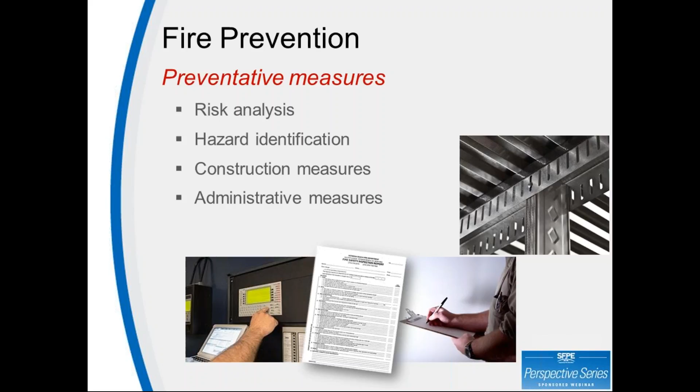Understanding that fires can and do happen, fire protection is a combination of active and passive components intended to minimize the impact of an event. Passive fire protection includes design of building and infrastructures, use of fire resistive and retardant materials in construction, provisions of isolating fire, firewalls and doors, smoke doors, training, signage, markings, and evacuation of building in case of a fire. Whereas active fire protection includes methods to detect a developing fire and alert emergency personnel, and a means to effectively extinguish a fire. So to minimize a fire risk and its impact, organizations should develop and implement comprehensive and objective fire protection programs.

Program elements should include fire prevention efforts, building construction improvements, methods to detect a developing fire and alert emergency personnel, and a means to effectively extinguish a fire. Each component is important towards the overall accomplishment of the organization's fire safety goal. It's important for management to outline desired protection objectives during fire and establish a program that addresses these goals.

The fundamental objective of fire protection is to detect, control, and mitigate the consequences of a fire. Understanding fire development and behavior is beneficial to better planning the protection process. Typically, fire begins as a slow-growth smoldering process, which may last from a few minutes to several hours. It's during this period heat generation increases during light to moderate volumes of smoke. It's during this stage that early detection, either human or automatic, followed by a timely response by qualified fire emergency personnel, can control the fire before significant losses occur.

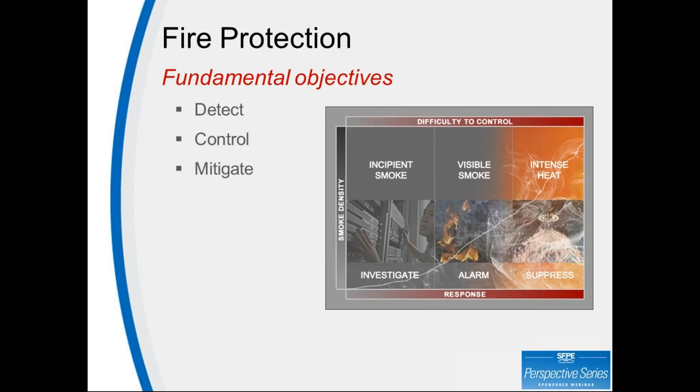So as fire growth develops, it becomes progressively more difficult to control, is the message here. The incipient stage of the development of fire offers the best opportunity to control and mitigate consequences of a fire, potentially turning what otherwise would have been a firefighting exercise into nothing more than a maintenance exercise.

Automatic fire detection and alarm systems play an essential role in meeting fire protection objectives. With so much at stake, it's imperative that they be applied correctly and are able to perform their intended function. There are a variety of technologies available, and selection is based off an effective response within a particular stage of fire development. There are essentially three major categories of fire detection technologies, the first of which are thermal detectors.

Thermal detectors include both fixed temperature and rate of rise detectors. Both of these units are classified as spot-type detectors. A third category of thermal detectors includes linear fixed temperature type devices.

Thermal detectors do not function until room temperatures have reached a substantial temperature, at which point the fire is potentially well underway and the damage is growing exponentially. Subsequently, they are not recommended in locations where there is a desire to identify a fire before substantial flames occur.

The second category is flame detectors, which are line-of-sight devices that operate on either an infrared, ultraviolet, or combination principle. Where there is a potential for incipient behavior and the goal is to detect before flames occur, similar to thermal devices, they are not recommended in locations where there is a desire to identify a fire before flames occur.

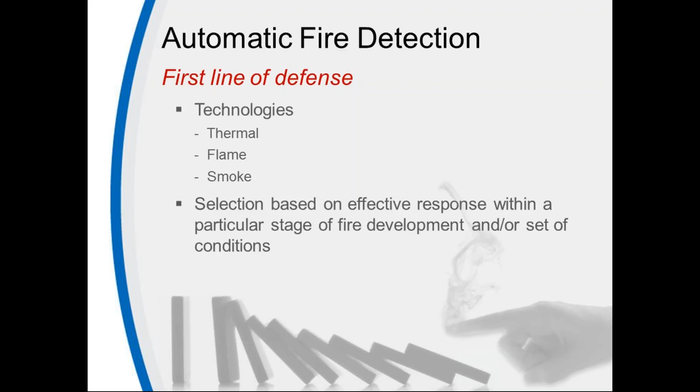Of course, the third and last category is smoke detectors. As the name implies, these devices are designed to identify fire while it's in its smoldering or early stages of development.

Common smoke detector technologies include, but are not limited to, spot type, beam type, and air sampling type devices. When properly selected, designed, and installed, a key advantage of smoke detectors is their ability to identify a fire while in the early stages of fire development. And as such, they provide added opportunity for emergency personnel to respond and control the developing condition before severe damage occurs. They are usually the preferred detection method in life safety and high-value applications.

Spot-type detectors that are placed along ceilings or high on walls operate on either an ionization or photoelectric principle, with each type having advantages in different applications.

For large open spaces such as atria, frequently used smoke detectors are optical or projected beam type devices. These types of detector generally consist of two components, a transmitter and a receiver, mounted some distance apart. As smoke migrates between the two components, transmission of light becomes obscured or obstructed, which is interpreted as a smoke condition.

Now, a third type of smoke detector, which is becoming more widely adopted for some of its performance attributes, is the air sampling type system. This type of detector consists of two main components: a control unit that houses the detection chamber, an aspiration fan, and operation circuitry. Then, of course, a network of sampling tubes or pipes.

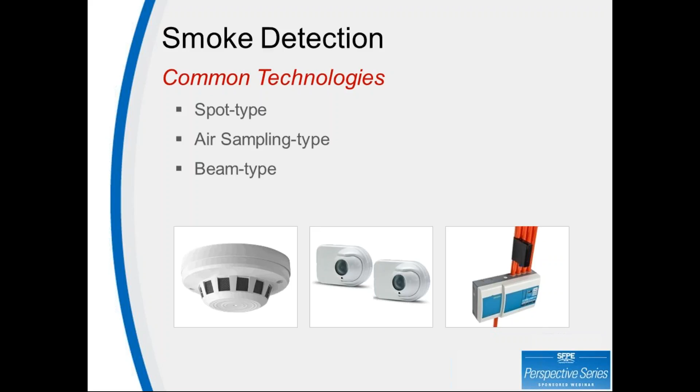Spot-type detectors offer key advantages with respect to addressability, electrical supervision, and signaling line circuit integration. They are simple to engineer into a project and, depending on conditions, relatively inexpensive to install.

Air sampling type detectors, having high sensitivity capabilities when properly applied and commissioned, are typically the fastest responding automatic detection method. Many IT and communication organizations have standardized on air sampling, but over the years application has significantly grown outside these verticals as a result of other key attributes the technology has to offer.

Attributes such as active performance, physical supervision, centralized performance, and multiple alarm thresholds across a wide sensitivity range have allowed the technology to be applied in a diverse range of applications, typically intended to solve particular challenges that would otherwise prevent other forms of detection technologies from being effectively applied.

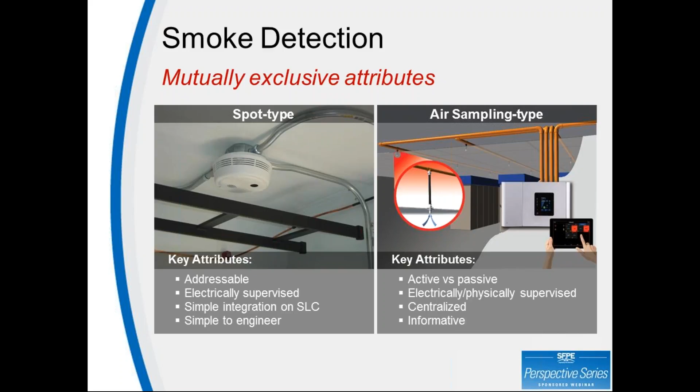While these are both great technology innovations, there remain challenges for certain applications that neither technology adequately addresses, presenting an opportunity for the development of new innovations.

Innovation generally comes about as a result of fulfilling a particular need or set of needs. As the act of innovating, it often starts with users expressing a desirable attribute to solve particular challenges. It's then up to the innovator to interpret those needs as articulated, and to anticipate the unarticulated needs, analyzing what is possible via technology and what is viable in the marketplace.

Innovations can take the form of a completely new method or approach, or take attributes of existing technologies having mutually exclusive attributes, refining and combining those attributes to form a variant of what exists.

Innovation is often the role of manufacturers, whose goal is generally to grow market share, maintain a competitive edge, and as it relates to fire protection, improve life safety. Essential to the process is voice of the customer, who in our world of fire protection could be the end user, specifying engineer, insurer, AHJ, or system integrator.

So as it relates to smoke detection, what do we commonly hear? Common challenges when installing smoke detectors include placement of detection points in congested spaces or tight quarters, complexity and cost attributed to installing conduits for spot-type detectors when required, or rigid pipe networks related to air sampling type systems in hard-to-access, congested, or retrofit spaces.

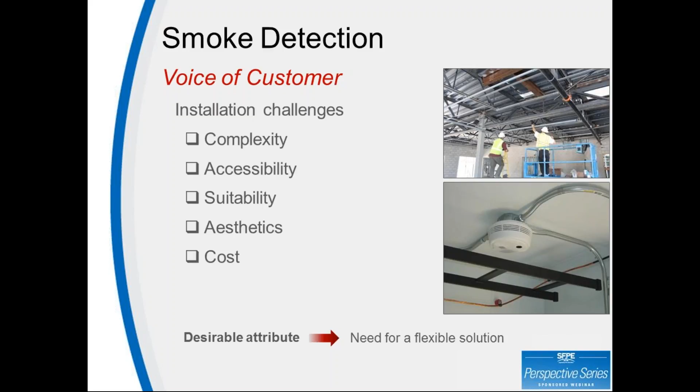Typical challenges as it relates to test, inspection, and maintenance of smoke detectors include, of course, accessibility of detection points in tough areas once installed.

This can include floor or ceiling voids when present, congested spaces above or near obstructions, hazardous locations, safety of personnel when working hazardous locations or in hard-to-access areas, risk of business disruption when working above sensitive equipment or processes, and security of information and assets in restricted areas, and of course increased life cycle costs attributed to working in challenging conditions.

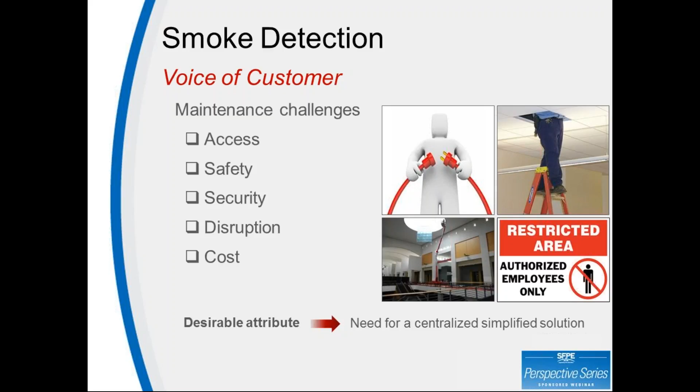The desire to have absolute confidence that smoke detection systems will perform their intended function when needed is also critical. While many appreciate the electrical supervision aspects of current technology, there remain questions about functional supervision - that is, the ability to detect obstructions or breaches that would otherwise render the detection system's performance ineffective.

So things like covers placed intentionally or unintentionally, or loading of debris over time, which potentially can go unsupervised, preventing smoke from reaching the detector. Or for an air sampling type system having a large pipe distribution network, the ability to supervise breach of a single hole. Routine inspections in accordance with codes and standards are intended to identify such breaches, but the desire is to not wait perhaps as long as a year before identifying such conditions.

So while these are articulated desires, an example of an unarticulated desire would be that the detection system incorporates preventative measures to routinely and actively keep debris from obstructing smoke.

Budgets are continually challenged. Organizations are continually looking for ways to reduce spending. So the message from the market is loud and clear: there needs to be a solution that can potentially reduce cost, either upfront or over the life of the installation.

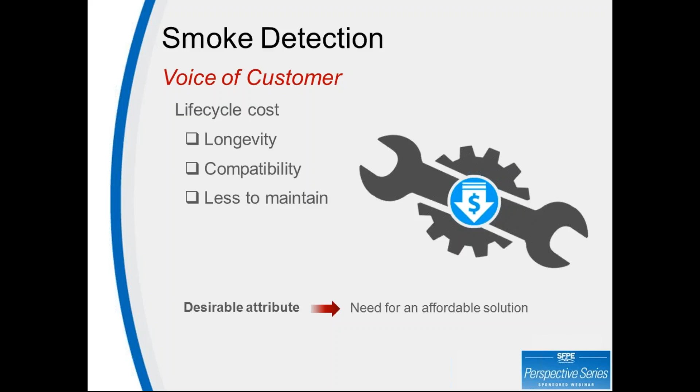The market wants a solution that has a long life cycle, is compatible if other parts of the system are replaced or upgraded, and is physically easier to test, inspect, and maintain. Centralized performance is of significant interest, but as well, a system that is compatible across panel models or brands.

There's also a desire that smoke detectors be more informative about their operating parameters and the physical environment surrounding them, so that personnel can make informed decisions. Things like real-time obscuration levels, event history, maintenance views, and multiple alarm levels for stage response were all important.

The market additionally desired that this information be easily but securely accessible anywhere, anytime, and that the information and tools for accessing the data be intuitive.

So responding to voice of customer, an innovation meeting most of what's been articulated is now available. Let's take a close-up look at this technology.

It was about 18 months ago when this technology was first released, and I had the privilege of introducing this technology via a similar SFPE session. Perhaps some of you were in attendance. While some things remain unchanged and will be a refresher, much has been learned about the technology since its introduction.

This innovation might be best described as a hybrid solution in that it incorporates addressable attributes of spot type detection coupled with key attributes of air sampling type detection, adding other essential attributes that set it apart from anything available before. One key attribute of air sampling type systems is their active performance, meaning the environment is physically and continually drawn into the detection chamber as opposed to passively waiting for smoke to reach the detector.

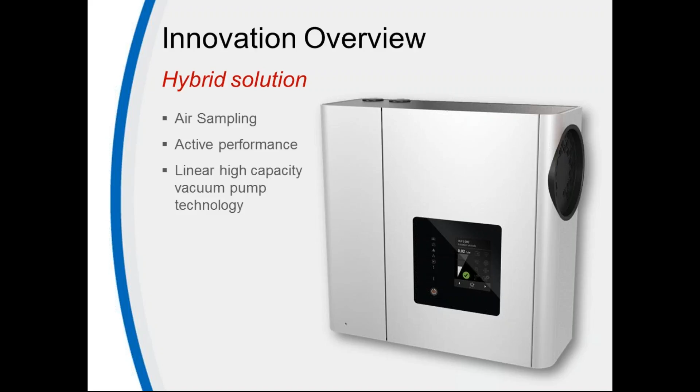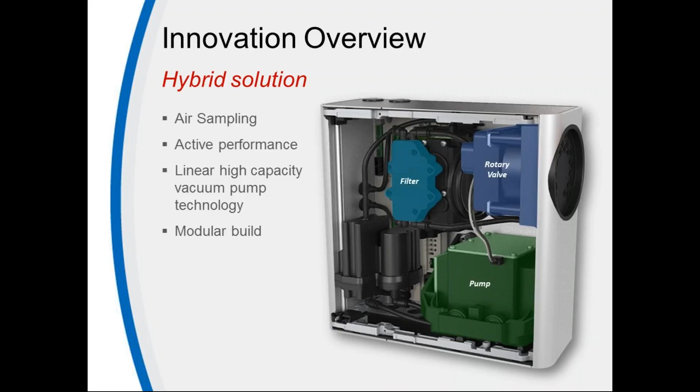The detector is modular in nature, with each component being field replaceable. Inside, for the main components, we'll find a rotary valve, a pump, a filter, smoke modules, and sample tube inlet, which accepts up to 40 addressable sampling points. So on one device, we have the potential for monitoring up to 40 discrete locations.

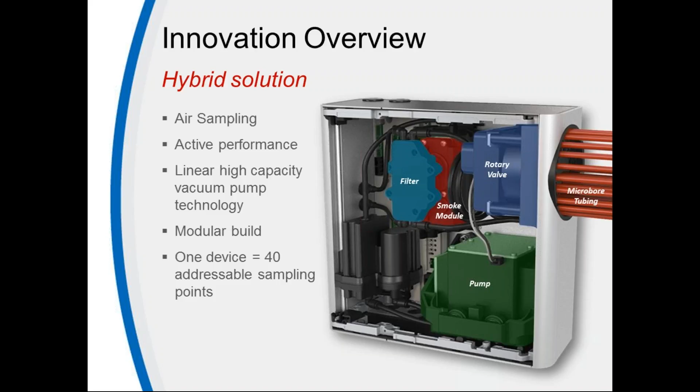System components are minimal and fairly straightforward. Main components of the system include the detector, an external 24-volt DC power supply, flexible fire-rated microbore tubing with a capacity of up to 40 tubes, each having a maximum capacity of up to 330 feet, and remote sample points available in either flush mount or surface mount configurations.

Unlike traditional air sampling type systems, there's no gluing of tubes. Tubes are easily assembled using push-in quick connect fittings for a secure connection.

The technology utilizes laser-based light scattering detection principle. Optical protection is provided, eliminating the need for incorporating drift compensation techniques or calibration requirements. This enables the device to provide absolute smoke measurement across the life of its operation.

There's a total of 2 detection chambers provided within the unit, each supporting up to 20 detection points. This reduces the effect of chamber dilution, aids in rapid detection of smoke in scan sequences, and also provides the ability to set up sensitivity for groups of detection points.

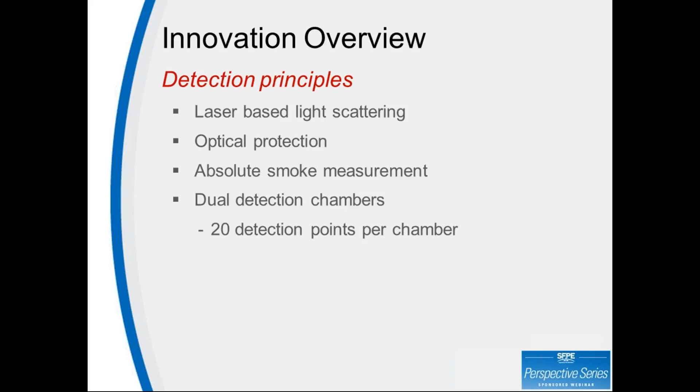There's a total of 4 alarm thresholds provided, and those are 2 pre-alarms and 2 alarm thresholds, permitting staged response throughout fire growth development.

The system provides 3 possible alarm threshold setting options correlating to sample port sensitivities, and those are high, which is 0.5% obscuration per foot, enhanced at 1.22% obscuration per foot, and standard sensitivity at 2.44% obscuration per foot.

Pre-alarms and Fire 2 are set as a percentage of alarm thresholds. This simplifies the process of setting up the detector, but yet allows the commissioning technician the flexibility to set thresholds in accordance with project performance objectives.

The innovation provides many ways to connect for programming, monitoring, and primary signaling. It supports network connectivity between devices over RS-485. It also incorporates a USB port, which may be used for initial configuration and local maintenance or servicing of the detector using a local PC.

It also supports TCP over Ethernet. The Ethernet port may be used for temporary programming or permanent network connection to the detector, and it provides a gateway to other devices on the network.

Wi-Fi connectivity is also supported. Wi-Fi allows connection of local client PCs to the detector and provides a gateway to any other device on the network. It can also be used for temporary programming or as a permanent connection to the network.

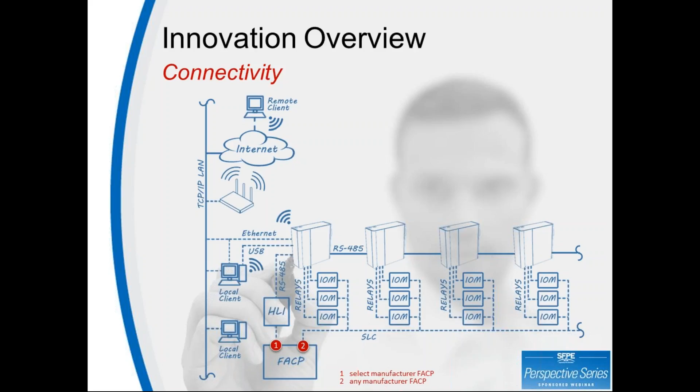So now let's take a look at the centralized attributes of the technology. Certainly a key advantage, centralized attributes allow for remote and centralized testing and maintenance of the system without ever having to go to individual ports in the field, unless they've been physically damaged and are in need of repair. This offers unprecedented safety and security, requiring only one man and no special tools, lifts, and so forth. Within a couple of minutes, 40 locations can be tested without any disruption to occupants. As a result, this offers significant cost savings over the life of the system.

The addressable attributes of the technology permit as many as 40 points to be addressed. Addressability is by tube. Expansion modules permit extending this to a total of 120 points. Addressability is ideal for compartmentalized applications such as prison cells, localized detection within fully enclosed equipment cabinets, for instance, or generally just where source location is desired.

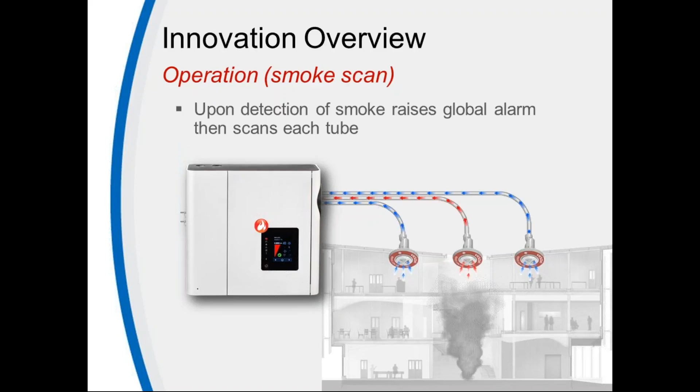So in operation, in its monitoring state, smoke and airflow are continually and actively monitored through all ports simultaneously, up to 40 ports. Upon detection of smoke, global alarms are raised. The unit then enters a smoke scan mode, scanning each tube in groups of 2, remembering that there are 2 detection chambers, until identifying the source by tube or tubes.

Another key attribute of the system is its automatic maintenance functionality. The system employs centralized automated testing and maintenance during its normal operation. This ensures that end-to-end system integrity is maintained, including the detector, tubes, and sampling points. Preventive maintenance is not required. During routine site maintenance, simply ensure that there are no faults present at the detector and conduct a centralized smoke test. This is an automatic function that can be set to occur upon a program period, or it can be user initiated.

For full end-to-end supervision, the system actively monitors both pump pressure and airflow, which allows for the detection of tube and sampling point breakage and blockage. Any changes in air pressure and flow will create a fault which will pinpoint the affected tube or tubes so that they may be inspected and resolved. Again, this is an automatic function or can be a user-initiated test cycle.

Now, informative attributes of the innovation have been carefully implemented to meet needs voiced by the market. The system stores up to 20,000 events in a non-volatile first-in, first-out buffer, providing a host of historical information about the unit's operation, the environment in which it's monitoring, alarms, faults, and user actions.

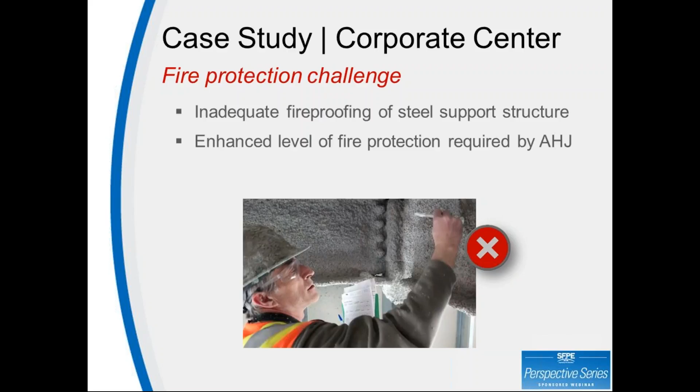The owner was given 3 options by the local authority having jurisdiction. The first option: remove skin and redo fireproofing using adequate material. The second option: triple the amount of sprinklers in the existing building. The third option: provide full area smoke detection coverage.

The first 2 options were deemed too expensive and posed considerable risk to budgets and occupancy schedules. The third option, full area smoke detection coverage, was assumed to be the lesser of 2 evils, but the owner had objectives they set forth as requirements.

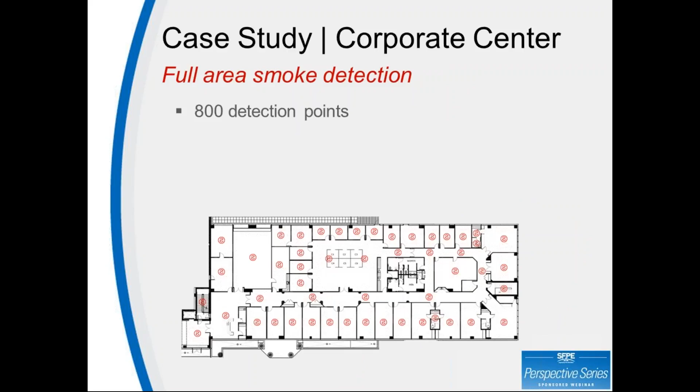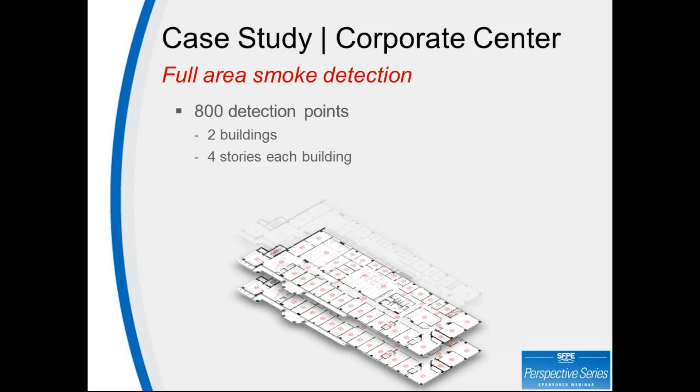Full area detection meant a total of 800 detection points across 2 buildings, each having 4 stories. Installation would have been in accordance with NFPA 72.

Looking at some characteristics of the building, it presented some challenges requiring consideration. With respect to the open exposed ceiling, with aesthetics in mind, the exposed ceiling throughout both structures would require careful planning and more detail for the installation of devices and material. Obstructions throughout both structures presented challenges for placement of devices near or above the obstruction, and of course accessibility concerns once installed.

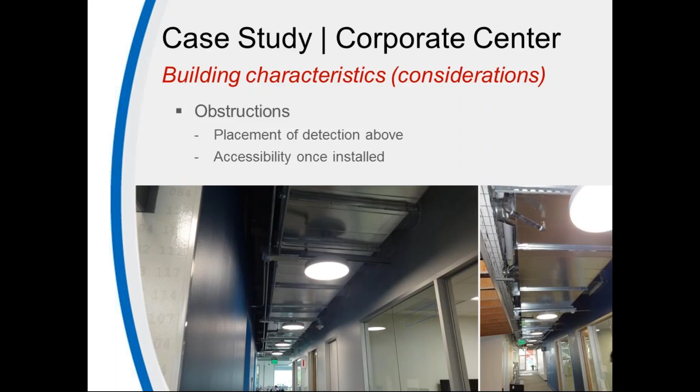Obstructions created by building features such as drop ceilings required placement of detection points above. Atria within both structures presented a challenge with respect to placement of detection points and accessibility once installed. Obstructions throughout atriums ruled out use of line-of-sight type technologies.

There were also some operational considerations that had to be taken into account, such as access considerations for routine test, inspection, and maintenance in restricted areas once installed. Disruption of workforce when conducting routine test, inspections, or maintenance. And the desire to have supervisory pre-alarms so that personnel could investigate conditions, potentially preventing an evacuation.

Building configuration coupled with operational considerations formed requirements set forth by the owner. Accordingly, the system had to, at a minimum: be addressable, be accessible without disrupting the workforce, be serviceable without requiring access to restricted areas, provide supervisory pre-alarms for advanced notification of a developing situation (this requirement tied directly back to limiting disruption), require minimal servicing, and of course be affordable across the life of the installation.

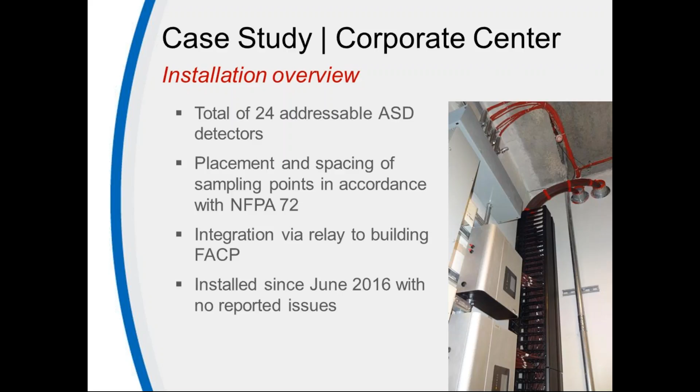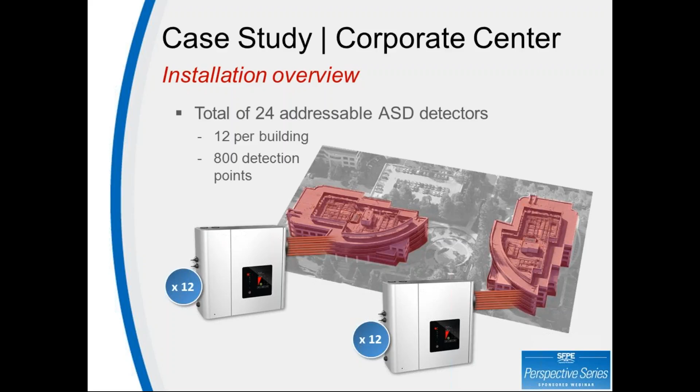The installation comprised of 12 addressable air sampling detection units per building, with a total of 800 detection points between the two buildings. It had a total of 3 addressable air sampling detection units per floor, centrally located within designated zones with tube distribution in mind.

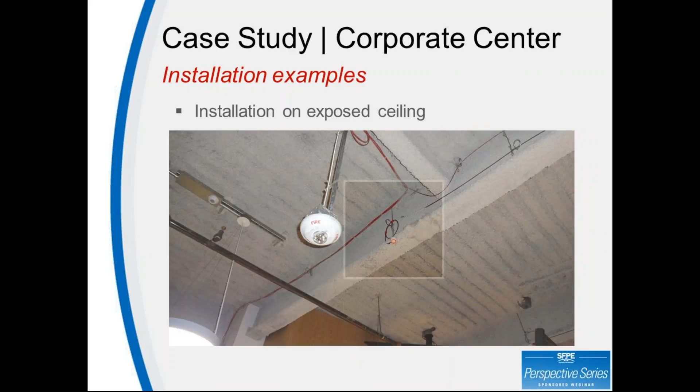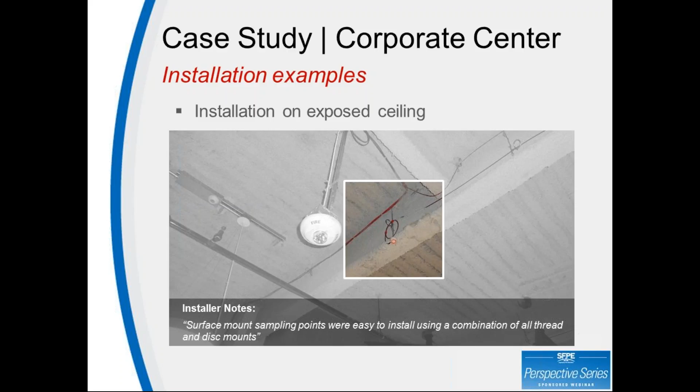Here's what the installation of the sampling point with microbore tubing on an exposed ceiling looked like. From the installer's perspective, the surface mount sampling points were easy to install using the combination of all thread and disc mounts.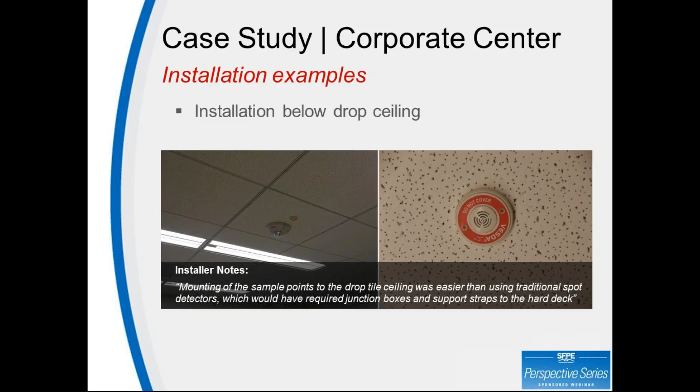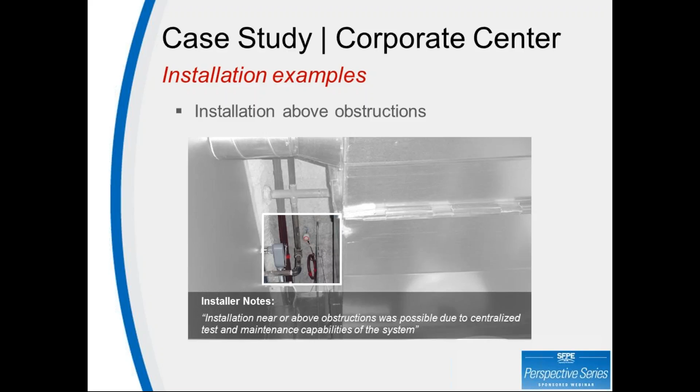Here's an installation example of a sample port located in a cramped quarter where it would have otherwise been difficult to install a junction box in a traditional device. Again, from the installer's perspective, due to their size, remote sampling points could easily be placed where traditional detection could not reside.

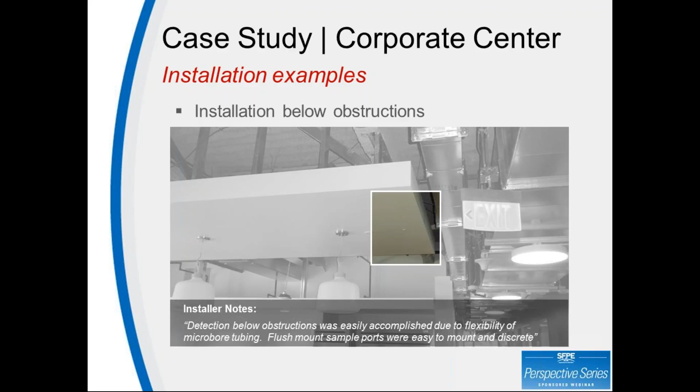Just a little bit more feedback from the installing contractor. Working with the new technology required a learning curve, but once we got a handle on it, it was pretty straightforward. Tubing was much like installing Cat5 cabling, simple to run, but took more planning than running an SLC, that is signaling line circuit.

Relay integration resulted in higher labor and material cost. High-level integration would be a great benefit. Installation of tubing on exposed ceilings required more attention to detail for aesthetic purposes.

And some additional installer feedback with respect to centralized attributes. Centralized accessibility for testing and maintenance is a game changer, will significantly reduce cost.

And from the owner's perspective, installation had been trouble-free from day one, 6 months running. Disruption of our workforce and access to secure areas were significant concerns for us. The centralized features of the technology eliminates both concerns.

Installation was a bit pricey as compared to other technology options, but we expect to see a 30% savings over the life of the installation due to the centralized features of the technology.

All right, so in closing, there are a variety of smoke detection technology solutions available. Each have their respective attributes and are ideally suited for applications in which they set out to target. New innovations set out to respond to a set of particular needs that haven't been adequately addressed within current technologies. New innovations, such as the one presented today, arm the industry with an additional set of tools, helping overcome existing challenges and potentially new challenges that haven't been yet realized.

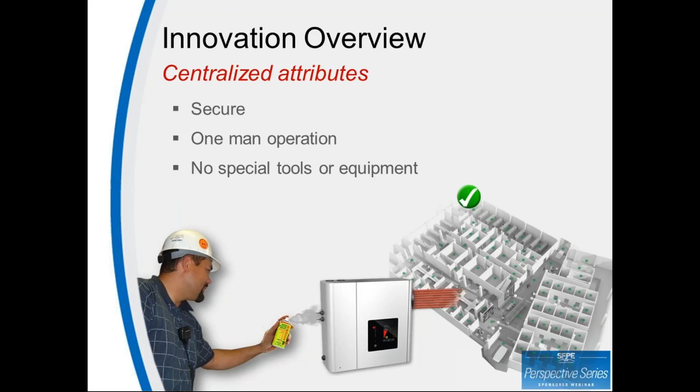So with that, we've fully tested the detection chamber, which then leaves the question of the integrity of the tubes. As we touched on, the idea is that the tubes are fully supervised—we're continually monitoring the tubes for blockage and breakage, and not just the tubes, but the sampling ports connected to them. So we have full supervision—functional, end-to-end supervision—not just electrical supervision of the unit itself, but also physical supervision of the tubing.

So if there's a breakage or blockage of the tube, or disconnection of a sample point, or something that impaired the sample point and the tubing back to the detector, we're supervising that continually. So we know that part is functional and tested, and in conjunction with testing the smoke detection chamber at the detection unit itself, we've literally accomplished a full test of the system. There's a lot of questions that come up in that respect because it's a fairly new concept, but I think we've proven through the supervision of the system and its capabilities that it's entirely practical and effective.

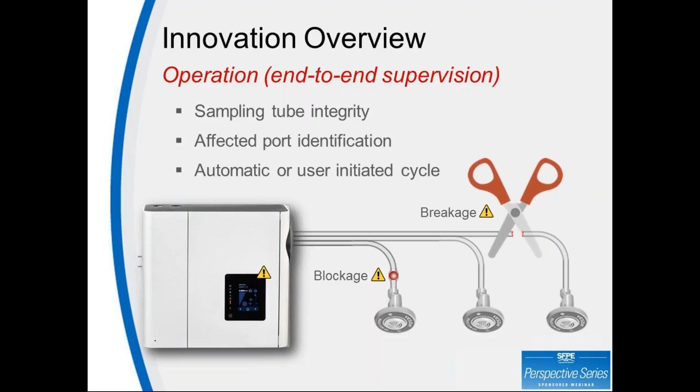A lot of questions also about the tubing itself. Is this something that's included with the system, or do you purchase this tubing separately? Yeah, we supply the tubing. It's micro bore tubing, either 4 to 6 millimeter, fire rated, and it's unique in that it's pre-printed in accordance with NFPA 72: 'Do not disturb smoke detection.' So there's that labeling on the tubing itself. It's also unique in that it offers a unique serial number per tube, so tubes can be identified, and it has length markers so as you roll out the tube you have precise measurement and an easy reference point to know how much tubing you've used. So it's something we supply, and it's easy to work with — as you saw from one of the installer's notes, it's a lot like working with Cat5 cabling in terms of routing and support.

So then, is it easy to cut the tubing for installation, if you want to fit it in a certain location? Yeah, exactly right. You have to ensure you get a nice flush cut on the tubing, but it's easy to work with compared to traditional air sampling systems, which use rigid CPVC where you've got glue and fittings and the assembly has to be carefully planned. This is unique in that it's just flexible tubing that's measured to length, cut, and connected via push-connect fittings to sample points and the detector.

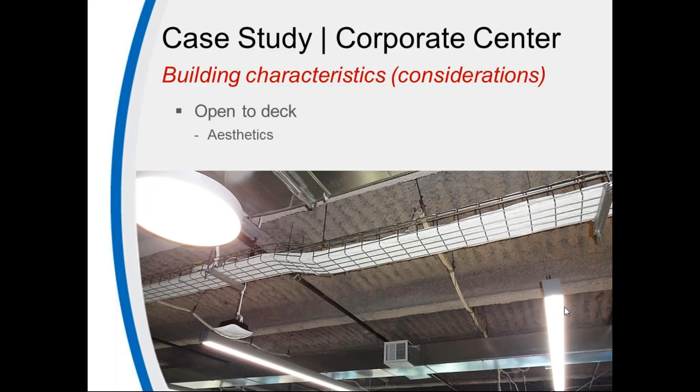Sure, and does this tubing have any minimum bend radius or flexibility requirement? Well, it certainly does. Off the top of my head I don't have the particular bend radius, but guidance is provided with respect to that. As you can see from some of these pictures, the tubing can be coiled in a pretty tight coil, which suggests it has a fairly tight bend radius. But to tell you specifically what that radius is, I don't know off the top of my head — it's something we can follow up on if questions are submitted to us.

Sure. And then what about the anticipated lifespan for this tubing?

Yeah, so nothing immediately jumps out at me in terms of it having a shelf life that would cause degradation or failure of the tubing over time. Again, that's something we could follow up on with more technical information with respect to the tubing material.

Sure. The other range of questions I'm getting is how do you identify where the alarm's coming from, and how does the zoning work so that when the fire department arrives, is there a way to annunciate it to a specific location so the fire department or maintenance knows where to respond?

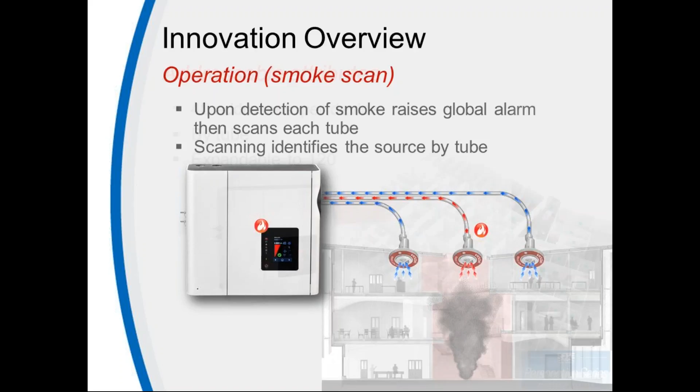Right, okay, let me find that slide. The maximum tube length—I'll just rattle it off—is a total of 330 feet. That could be a combination of up to 40 tubes, each at 330 feet. So you can appreciate the capacity of the system in that regard. A lot of flexibility.

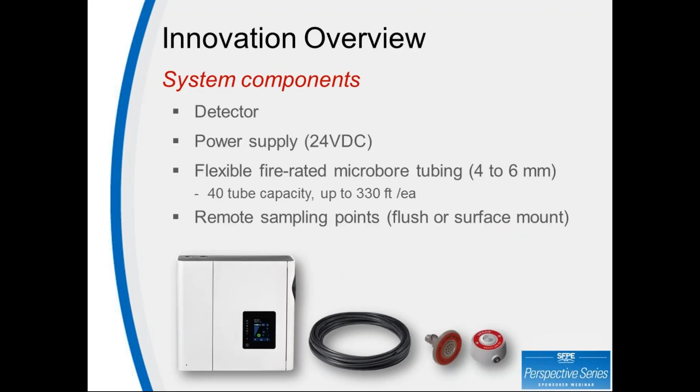Of course, as you plan your installation—like the particular scenario we were highlighting for the case study—you plan your zones so you have distributed tube runs, but try to centralize your detector to reduce the overall length of tubing where you can.

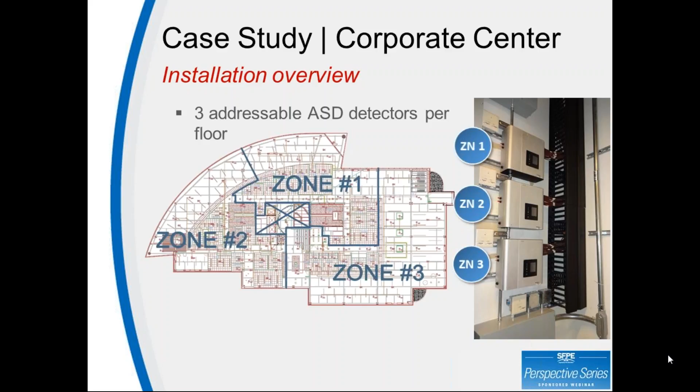Okay Stephen, I think this will be our final question since we're getting to the point where it's time to end, unfortunately. You mentioned debris earlier—with a spot-type smoke detector, you worry about it getting dirty or collecting debris. But is air sampling more susceptible to dust or debris, and how do we watch out for that once these systems are in service?

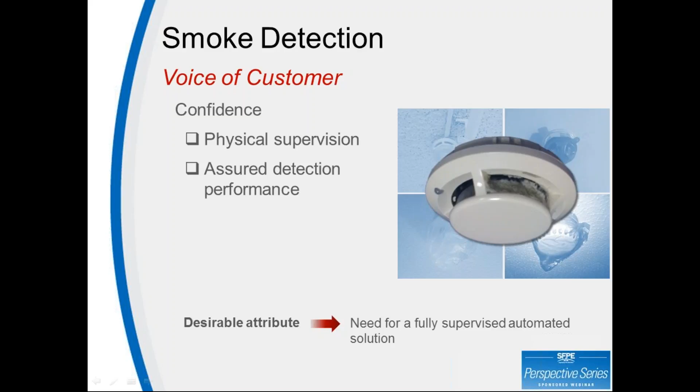Yeah, with an air sampling type system there's generally a filter in place before the detection chamber, so we can capture a lot of that debris instead of bringing it into the detection chamber, which is ideal. Then with supervision of the tubing, we can identify where debris may have caused a restriction in airflow, generating flow faults. But one key advantage of this technology, which was voiced as part of the voice of customer feedback, is the ability for the system to self-clean from debris buildup. At high velocity, tube by tube, the system routinely cycles through each tube on a programmed period and performs a purging of the tubing.

It does this in groups of two, so it's a rapid process that goes through each tube and ensures it clears itself from debris—a unique aspect of the system in that it's self-cleaning. There are ways to accomplish this on a traditional air sampling system, but that's usually an after-the-fact addition, like a connection point and solenoid for compressed air, or simply connecting a shop vac to clean out the tubing. But this detection technology automatically does that by way of its operation.